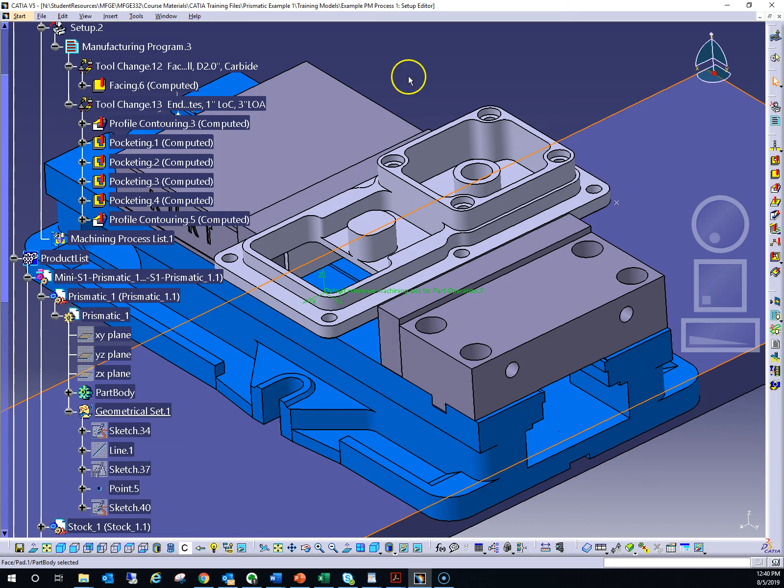In this video we're going to look at how to analyze in a little bit more detail what we've done so far in machining our part. This is the part you've been working on, and in the last few videos we've been looking at machining pockets in the second setup.

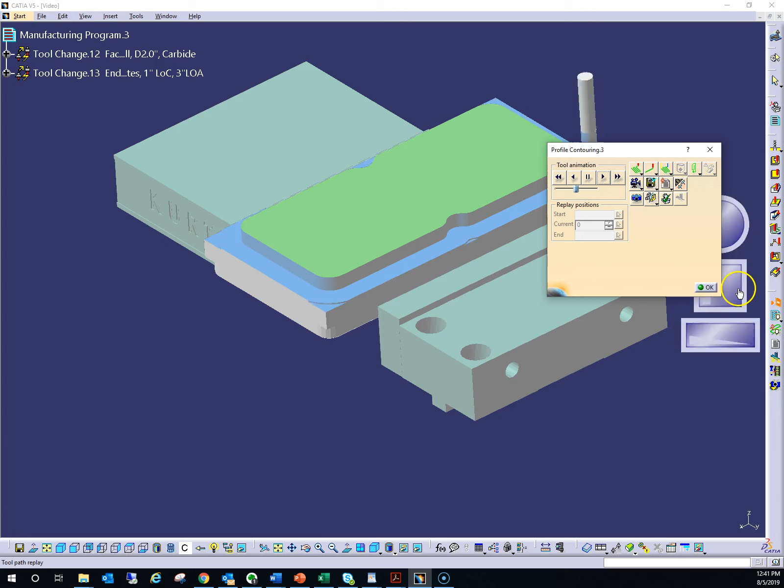Just to show where you are, I'm going to go into this last operation, the profile operation, and do a material removal full video so we can see where we've gotten to. There's the facing, profiling, two pockets, bottom one with an island - these are closed pockets. Then we've done two open pockets and a profiling operation to clean up the island. So that's where we are in terms of progress.

Just to recap a few things before I show you a little bit more how to analyze what's been machined as part of your decision making towards what to do next. Let's go ahead and hit OK.

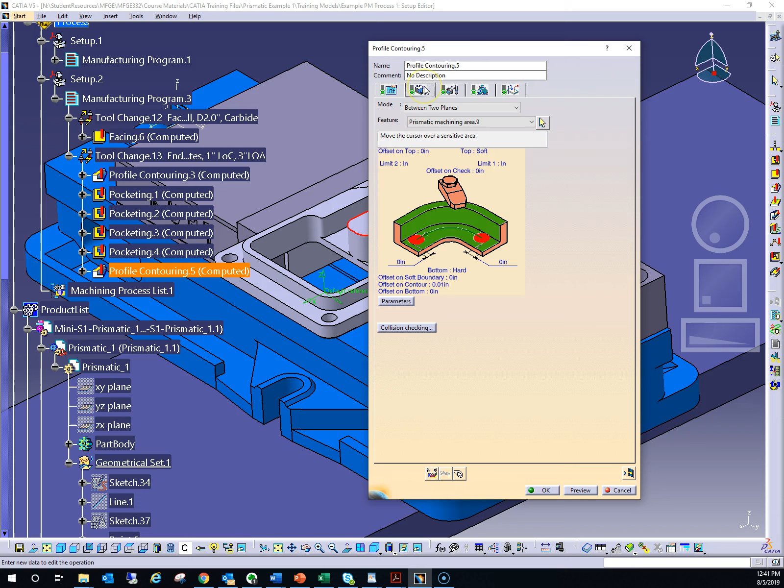Let's look at this profiling operation, which machined the top of the island. Remember, we haven't done this bottom pocket yet. If we go to the geometry tab, notice we have an offset on contour set to 10 thousandths, meaning we're leaving material on top of the island, so that when we machine this bottom pocket, we can remove all of that material, both top and bottom, finishing this bottom pocket with the tool. So that's why we left 10 thousandths on this contour.

So that's one place where there's left material. Let's hit OK here, and let's go back to the top open pocket.

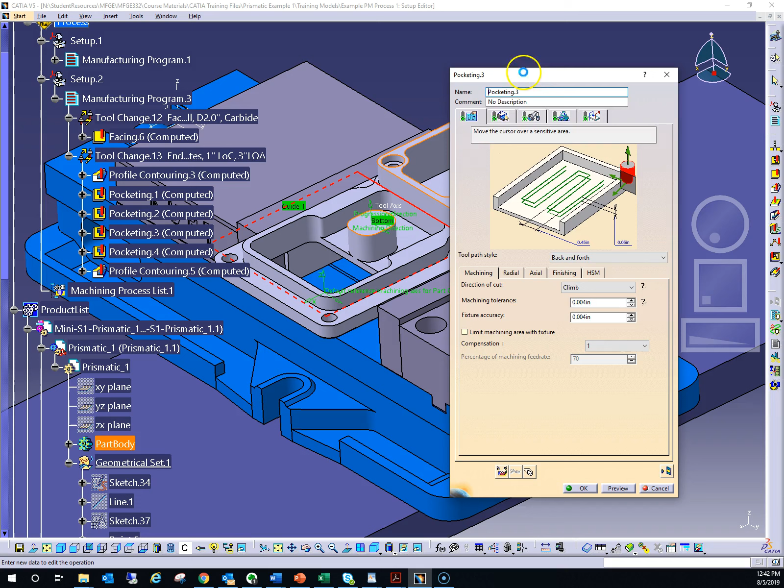So this is this one here. If we go again to the geometry tab, you'll notice we've also left 10 thousandths on the hard boundary. These dashed lines are the soft boundaries to which the cutter can move. The solid red line is the hard boundary, and we've left 10 thousandths material there, because at some point we have to program a profiling operation to clean up and produce a step on this region, so we're leaving material there to finish all the way around when we program that operation.

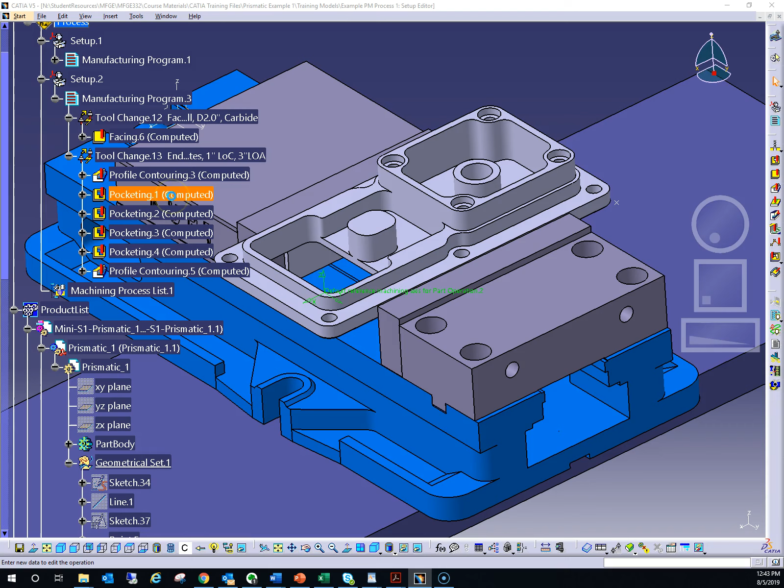Then if we go back to the very first pocket we did, on top of this island, you'll recall we also left 10 thousandths on the bottom - the bottom we defined was the top of this island, this annular surface. So there's 10 thousandths material on that. So there's some left material, and we've left it for good reason.

We've left material on the top of this island so that rather than finishing this pocket and spending a lot of time finishing material that's going to be removed because of the pocket below it, we can go back in and very locally do a finishing operation to clean up the top of the island. I should also mention we did the same thing for the top of this other island.

So again, if we go to the geometry tab, notice there's an offset on the bottom there too, so there's 10 thousandths on the top. Again, the logic being the same - we don't want to be finishing all the way out here when we're removing that material when we do the pockets below.

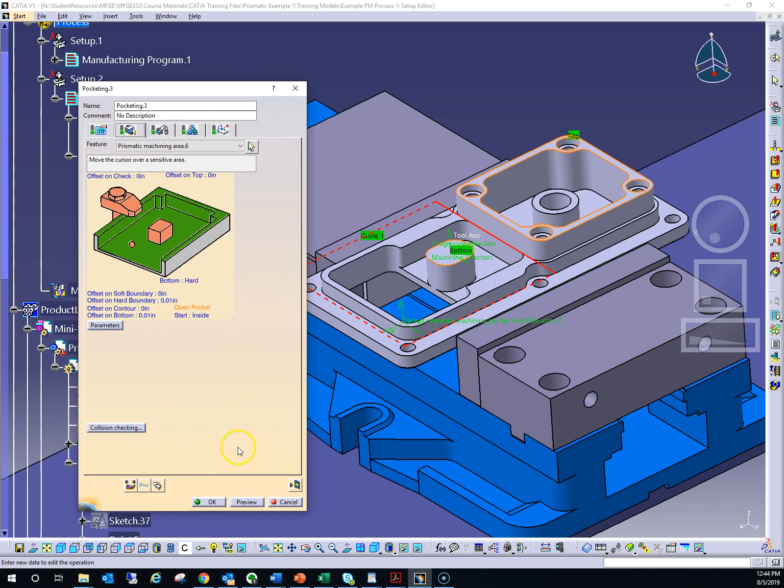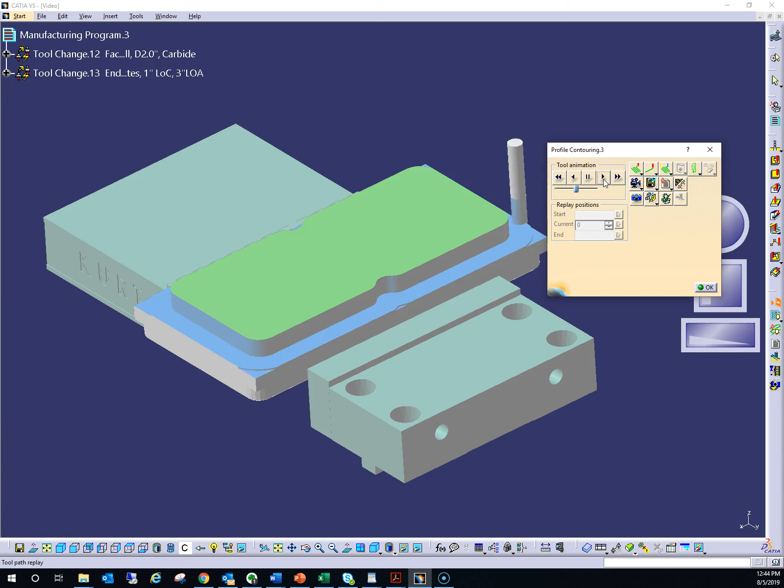Okay, so let's go ahead and look at, as I said, I want to show you a little bit how to analyze more of what's left to be machined. So let's go into the last operation, generate our tool paths, and do a full video replay. Let's run through it - we go through and simulate the removal of material all the way to the last operation that we've put into the tree.

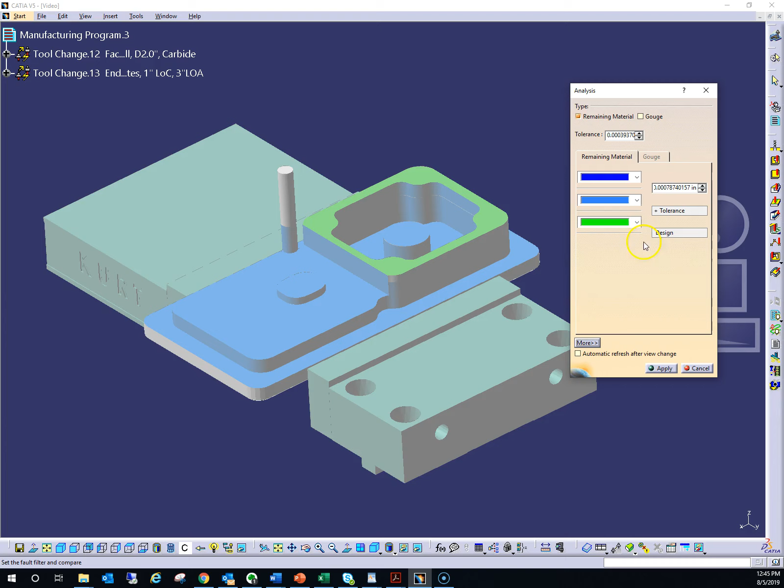What we're going to do now is go over to the second column all the way down to the bottom - there's a tool there called Analyze. Let's click on this. This is what the tool looks like. It allows you to display, using a color chart, the remaining material as well as gouging. There are two check boxes here, and right now remaining material is checked.

If I check gouging, the gouging tab becomes active too, and I can use colors to show if the cutter has gone into the part where it shouldn't have, as well as use colors to show the remaining material, in other words material that has not been removed. I'm going to deselect gouge, and let's just look at the remaining material for now.

There's this button here that does more. Right now there are 3 colors that will be displayed. Green indicates where the machining has gotten to the design surface, so that appears green. Then there's a tolerance, which is very small, in this case 4/10,000ths, where if you have an error within that tolerance range, it's going to be this lighter blue. Then here's a larger remaining material range, which is twice this almost, and that's the darker blue. Now that's only 3 colors, and we may want more.

So let's click on the more button, and this shows you a much larger range of colors that you can display. Again, design is green. Within the tolerance, which is set here, it's going to be lighter blue, and then so on. These are the ranges that CATIA has created by default. Now these ranges aren't particularly helpful, the default values, so let's change these a bit so that they give us a little bit more information.

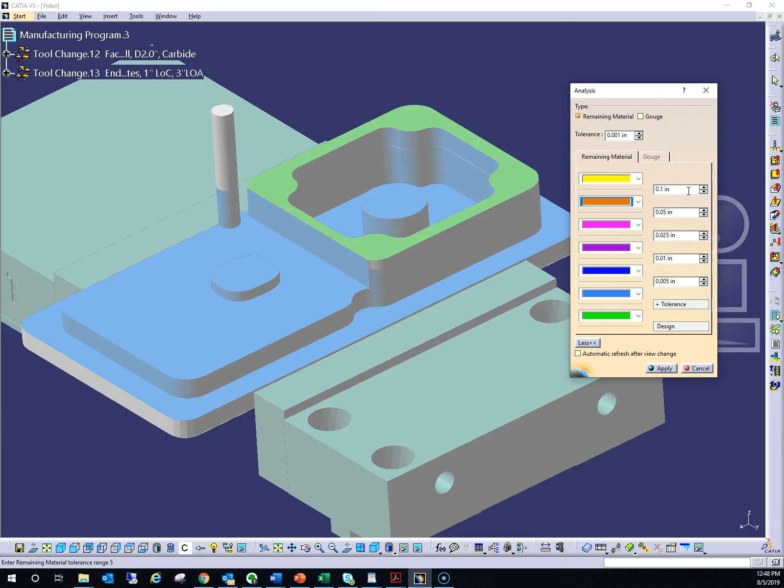And the next one up, I'm going to go to 10/1000ths, or 0.01. This one is useful because that's typically the machining allowance for finishing, so this will display in purple. And then the next one up, let's go to 25/1000ths, and then let's go up to 50/1000ths, and 100/1000ths, or 0.1. Okay, so this gives us a little bit better color distribution. Let's go ahead and hit the apply button now.

And there we see our part now has colors on it, and these colors help tell us exactly what's going on in terms of the left material. Again, green is design, so everywhere that's green indicates the cutting is completed, we've now gotten to the design surface. If we go up, there's nothing in light blue or either of the 2 blue colors.

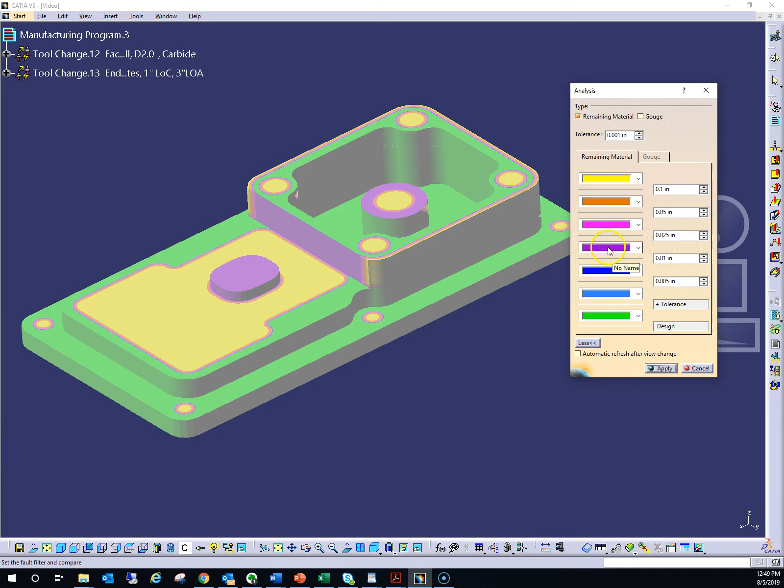We do see some colors that are this purple color. And if we look at where that purple color is, if you zoom in, by the way, you need to hit apply again to clean things up. You'll see that this is telling me there's 10/1000ths material left on surfaces that are this color.

Now, as we discussed, we left 10/1000ths material on this wall here to finish as part of the profiling operation that we're going to do pretty soon. We also left 10/1000ths material on top of this island, and 10/1000ths on top of this island, as well as around this island, with the plan being to finish this island when we remove this material here. So again, the color map shows you quite clearly where you have deliberately left material, as well as what still needs to be machined.

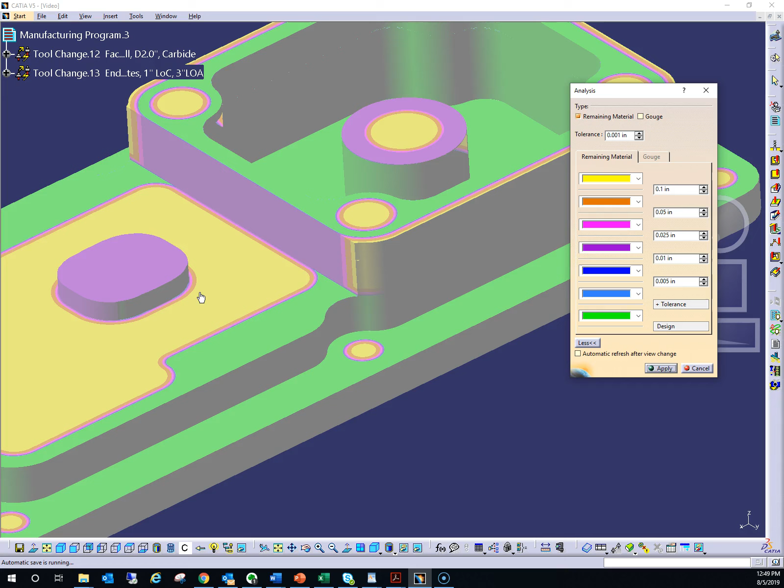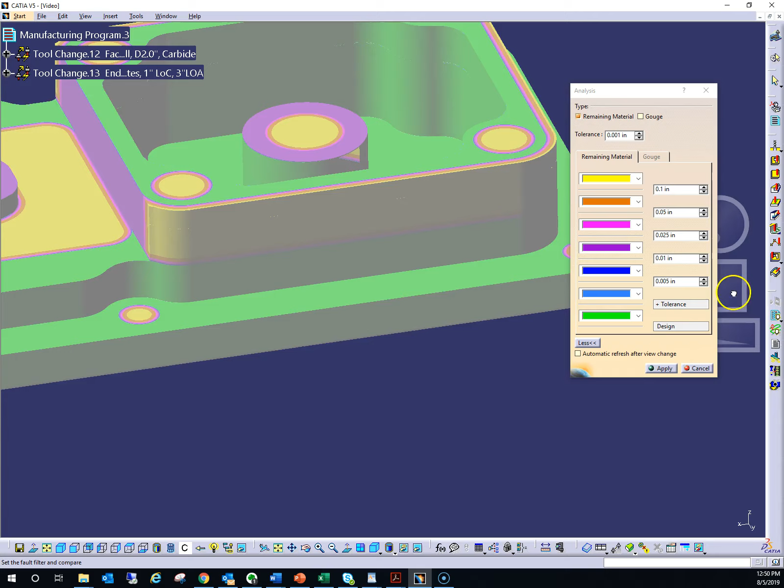So we see quite clearly that we need to machine still this profile that goes around, again hitting apply. We see that we have quite a bit of material still to remove there. And then of course we have the holes, all of which still need to be machined. We have this circular pocket here that needs to be machined too, and then finally all this pocketing over here that needs to be completed as well.

So again, this is a very useful tool to help you visualize what still needs to be machined, particularly if you've left material to help with operations that need to be removed when you do operations that are following. The gouge option is also useful.

In this case, you would have to hit check, and then gouging would tell you if you've accidentally gone further into the material and actually into the design. Let's just apply this to see. The gouge tolerance is a little bit off here, so let's change this. This is at 1/1000th, so we have to bump this up so it's larger than the tolerance. Let's say we want to see gouging within 10 thousandths of an inch. Let's apply.

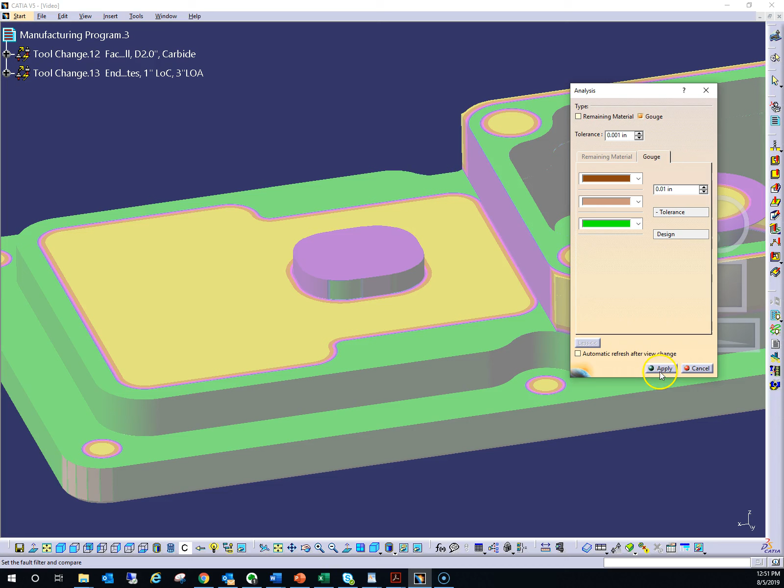So again, normally that color would be superimposed, or a better way to do this would be to uncheck remaining material and just display gouge by itself. And if we look, if there was gouging, we would see brown appear.

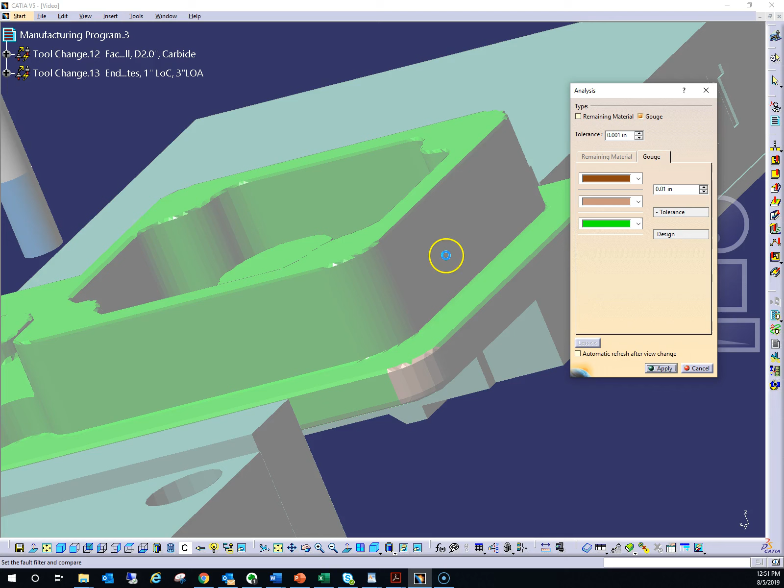Notice that there's this color here, which is the tolerance, so this is within 1/1000th, so it's not really gouging in those regions. So again, we can see that the part doesn't show any gouging over the tolerance zone that we've specified. So for example, if you ran the cutter through the part wall as we did earlier, that would show up most noticeably as a dark brown color to indicate that you've gouged.

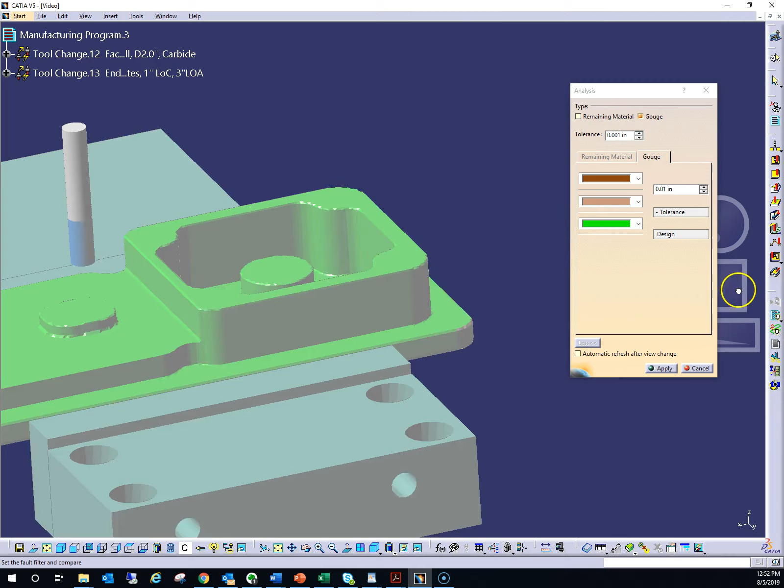So again, switching back to our remaining material, this is a very useful tool for you to help in assisting with your planning, identifying what's left to be machined.